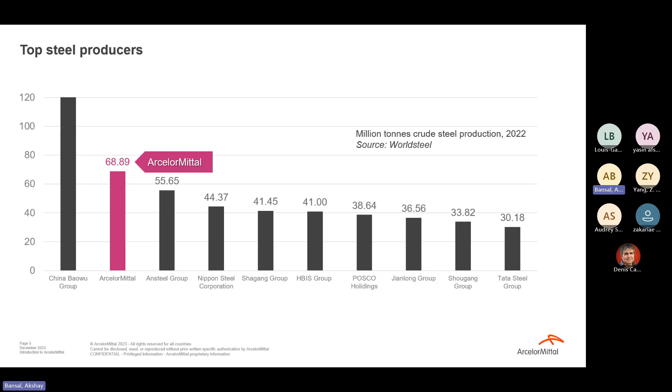And you can see that it's really fragmented. In the world, typically we produce around 1.5 billion tons of steel every year. The largest is 100 million or 120 million. So that means that it's really spread out. There are many different players inside the steel industry, and amongst all of those players, ArcelorMittal is right now the second in terms of production.

Okay, we are committed to a net carbon neutral target by 2050. We have a full roadmap which has been published in order to achieve that in Europe, but also all across our group. So 25 years is basically tomorrow for us, because in any major transition, we're not only talking about changing the way that we're doing, but transforming the things that we've been doing for the last 200 years. We need to change that in the next 25.

So we are definitely counting on new colleagues, just like yourselves, who will play an important role in achieving this target, while at the same time achieving the technological and scientific targets, the economic targets, but also the carbon neutrality targets, the environmental targets. So we need to be able to combine all of those.

Okay, there are some examples here that you can see. Something that really motivated me are some first-of-its-kind solutions which have been implemented, where ArcelorMittal has invested a lot of resources in terms of time, money, energy, research, that you see today but was started maybe 10 to 15 to 20 years before. So we always need to be preparing for the next 20 years.

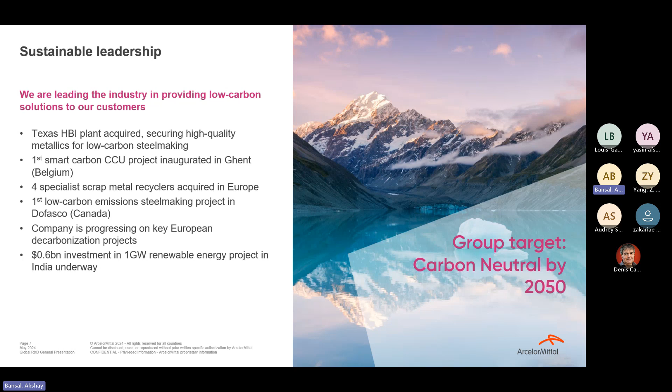I'm representing ArcelorMittal, but also global R&D, global research and development, where we are roughly 1,700 researchers, of which roughly 800 are currently in Maizières. That's where the historical R&D base has been. We spend roughly $300 million every year on research. So we are preparing for the next 10, 20, 30 years, while our colleagues at the production sites manage the day-to-day operations and production-related KPIs.

All our researchers are spread across 14 different geographical sites. We're not working only on metallurgy. You can say, okay, you're a steel company, you should work on steel, metallurgy, and so on. But no, steel cannot be made just because we know metallurgy. We also need to know process industry, energy systems, automation, mechanical engineering, civil engineering, data science, of course, optimization, chemical industries, and so on.

So if you enter global R&D, for example in Maizières, out of those 800 colleagues, I think you will find almost all the technical backgrounds that you have in INSA or any other engineering school.

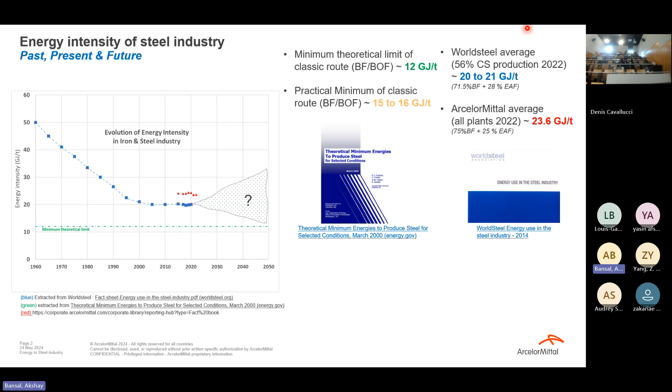You can consult some of these documents that I have here. These are not my numbers; these are public numbers coming from scientific articles and so on. And here there are two scenarios for how we can probably move. Either in scenario one we manage to find decarbonization technologies which are also low energy intensive. In that case, we are probably going to go from the current blue line towards the green line.

And the worst scenario, scenario two, is that we do the decarbonization, but we use some higher energy intensity solutions. That means we're going to go more towards a higher upward trend. So the risk is we're going to displace the problem from CO2 to energy. And even though energy could be green, it does not mean that we need to waste it. So we have to keep all of this in mind.

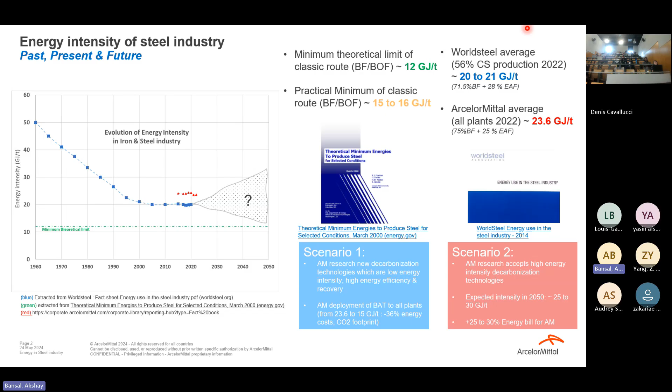The 23.6 gigajoules are the red dots that you see, which represent the ArcelorMittal numbers. We are, quote unquote, worse than the world average, but we are probably better than most of the others because we are publishing all of our numbers. We are fully transparent. So currently we are sitting at 23 gigajoules of energy per ton. So what does it represent? And this is only 1 ton of steel.

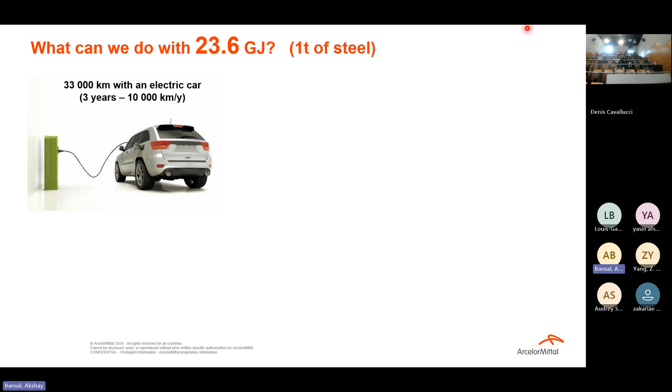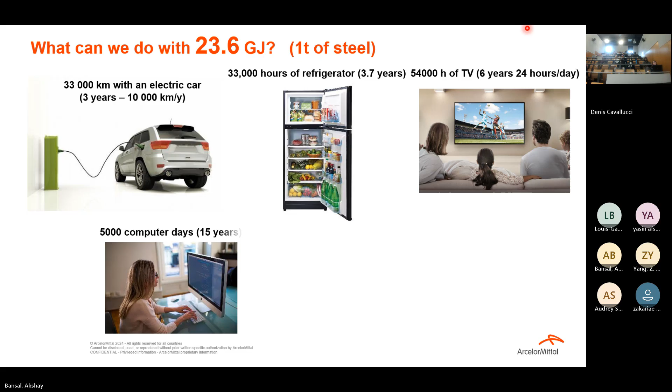23 gigajoules represents 3 years of electrical mobility, roughly 30,000 kilometers. Or 4 years of refrigeration, or if you wanted to binge watch Netflix, almost 6 years of Netflix nonstop, or 15 years of computer time, or if you were a very clean person, almost 50 years of nonstop washing. Just to say that this is 1 ton of steel. A car typically has around 1 ton of steel, maybe more. And how much do we produce? We produce almost 70 million tons of steel in ArcelorMittal. In the world, we produce 1.5 billion tons of steel. Billion with a B.

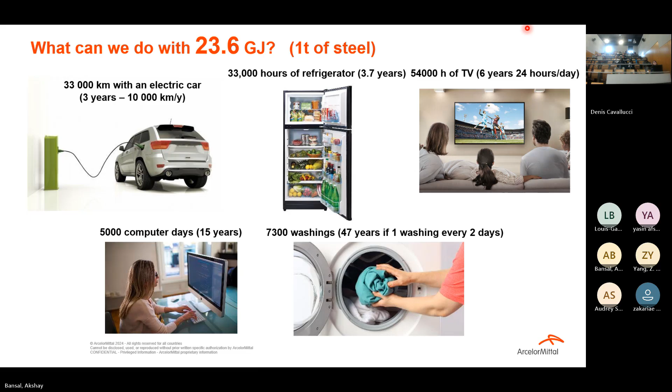Till now, about 70% of steel is made through the blast furnace route. You take the iron ore and the coal, you prepare them in the sinter plants or pellet plants and the coke ovens, and you bring those into a blast furnace. A blast furnace is nothing but a countercurrent chemical and heat reactor. You feed the raw materials from the top and hot gas from the bottom, and you have the thermal reduction process, but you also heat up and melt the iron ore, and at the end of it, you come out with pig iron.

Okay, so that's basically iron without the oxygen. There are some carbon molecules attached to it, so that's what we call pig iron. In French, it's called fonte. Okay, so once you have that liquid iron, that liquid metal is taken to the steel shop.

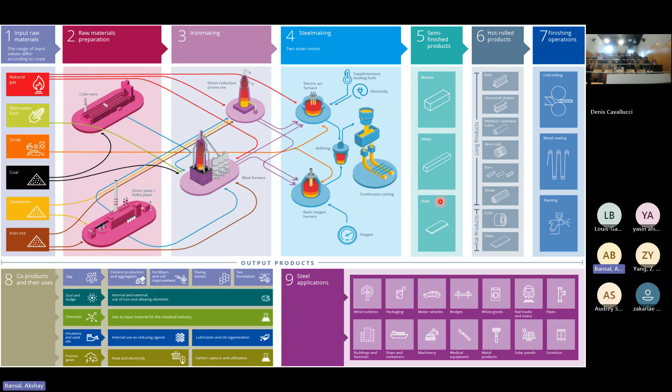Okay, I don't know if you're familiar with this kind of representation, but this is what we call energy Sankey diagrams. It's showing for each process what the inlets are, how the energy is coming into the system and how the energy is going out of the system. Let's take a small example. I'm going to zoom in on the coke plant. The coke plant is basically doing the pyrolysis of coal in absence of oxygen to create coke, and that coke is then used as a reducing agent inside the blast furnace.

Here we're already using the blast furnace gas from the blast furnace, and the coke oven gas from the coke oven itself is being fed into the coke plant. Coal is injected as well. And then you can see on the right hand side, in the red arrows, the different places where energy is coming out. Energy is already coming out in the form of coke oven gas, which is reused.

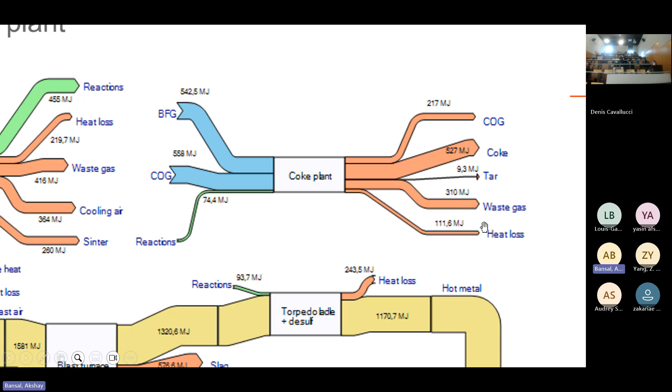In case of coke, in case of tar, in case of waste gases, heat losses, and so on. All of these numbers are in megajoules per ton. So if you go and read about these kinds of things, you're going to find that there are still some places where we are not able to recover the energy, and that energy basically corresponds to that gap that you saw earlier between the 20 gigajoules and the 12 gigajoules.

So that's the 8 gigajoules, which corresponds to all the waste energies that we still have in our processes, which we are not able to capture right now because of lack of technologies, or because it's very difficult to recover energy from something which is solid or liquid at 1200 degrees or 1600 degrees. If you just put a heat exchanger on top of it, the heat exchanger is going to be destroyed within a few weeks. A typical heat exchanger would simply not work.

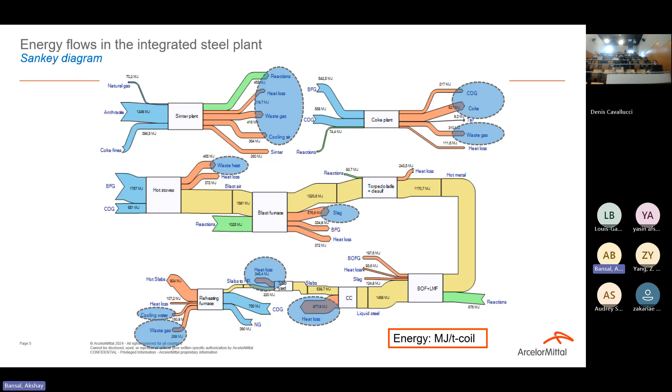So you need to imagine new kinds of heat exchangers which are not on the market in order to hit those higher temperatures. And we are also talking of very high energy fluxes, hundreds of thousands of normal cubic meters per hour of gases, very high temperatures, dust, pollution and so on. So you need to be able to manage that. So these are just some

The steel industry in general is responsible for 7% of all greenhouse gas emissions. Here's an example of the CO2 footprint, showing which process is responsible for what CO2. Typically 60 to 70% is at the blast furnace level. That's why you hear a lot about replacing the blast furnace by a direct reduction plant, or through electric arc furnaces.

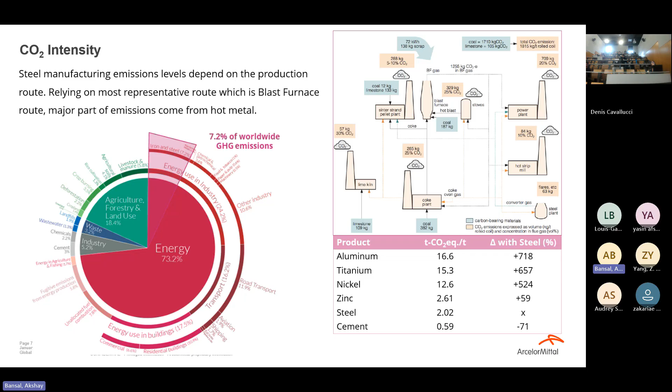So at this current state, steel has 2 tons of CO2 to manage per ton of steel, and there are different ways of reaching the target. We have a big target in front of us. Within all of this context, energy and CO2, we want to propose this project to you within the ECIU framework, where we want to understand how solar energy can be integrated into the steel industry. And not solar PV, we want to integrate solar thermal.

So you have heard about solar thermal energy. People in the room, have you heard about solar thermal energy before?

Yes. So maybe hot water out of solar thermal. Yeah. So you have those solar panels. Everyone has heard about photovoltaics. Okay. Some of you have heard about solar thermal. So what we want to focus this project on is the solar heating applications.

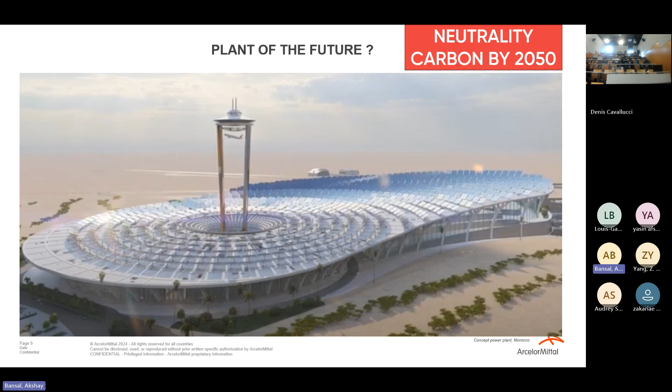You have the tower in the middle, you have panels, not solar PV panels, but solar collector panels. Basically, these are like mirrors, which are going to reflect solar rays towards the concentrator. Okay, and then once the heat has been concentrated, you can use it for different industrial purposes.

Okay, so the aim is that you determine the different ways to integrate solar energy, and that is solar heat, not solar photovoltaic, solar heat in iron and steel making processes, either the existing processes or the new processes which are being developed right now. They could also be beyond the scope of steel industry. They could be through carbon capture. They can be in hydrogen production. They can be in different ways. But that should be your solutions.

Okay. Once you have done your analysis of the problem, once you have reached that level of maturity, you will find that these solutions will come up. Some open challenges that I can propose to you right now. Okay, but again, this is not an exhaustive list. My understanding would be that you will be going through your project, you'll be also identifying other open challenges and then solving those open challenges. So some I have noted.

One of them is how to ensure that the heat that is available at the solar tower, which is beyond 1000 degrees, even in some cases 1500 degrees C, that you don't reduce that. I don't know if you're familiar with the concept of exergy. Someone? Exergy is basically the quality of energy. In another way, it's the temperature level of energy. Okay, 1 gigajoule of energy in a glass of hot coffee is not equal to 1 gigajoule of energy in hot steel. The temperature is different. So the concept of exergy comes there.

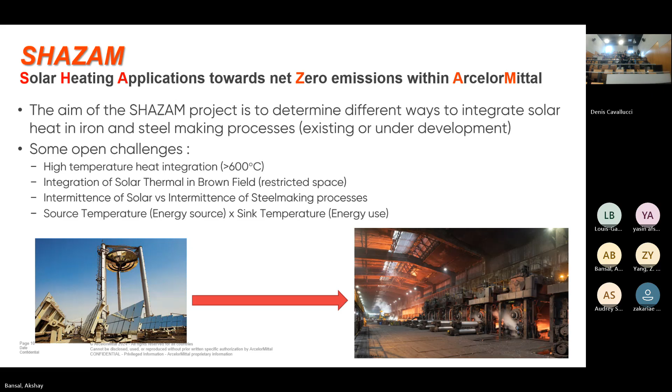Another recommendation could be, instead of looking at the steel industry fully, because you will have trouble during your project, maybe you can choose one area, or maybe you can choose one process. Okay, you are free to choose which process you would like to work with. Each process, as we saw in the Sankey diagram, has their own influx of energy and outflux of energy. So you can choose. You can just focus on the hot rolling, or you can just focus on the coke plant, or you can focus on the DRI, or you can focus on the blast furnace, and so on. Up to you. So the choice is yours in that way.

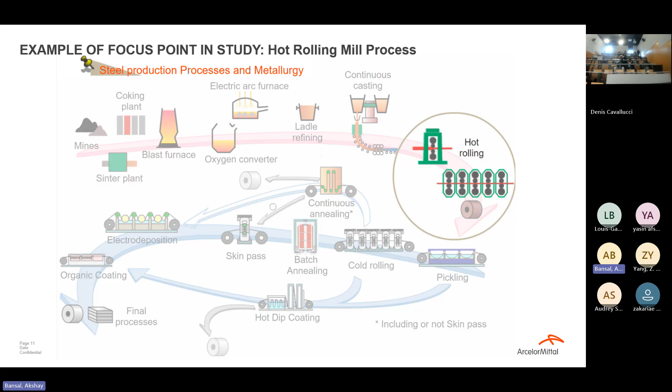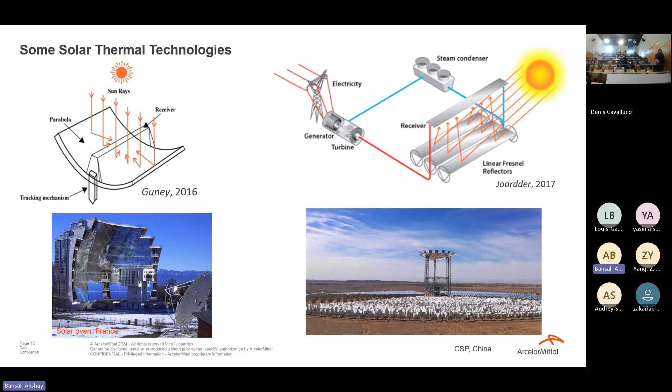Also, there are many different solar technologies already available on the market. Again, up to you to match those solar energies with the process. There will be some solar energies which do not produce 1600 degrees heat. They only produce steam at 400 degrees or 200 degrees. But then maybe you can match it with some industrial process which needs the steam at 250 degrees. Okay, but that should be part of your thinking process, and that should be part of your resolution of problems. So I'll stop here and then open the floor for some questions,

Up to you. If you feel that in order to satisfy the intermittence on both sides, energy storage is one way of, let's say, solving that problem, maybe. But that should be part of your reflection once you have identified the real problems. Okay, storage could be good, but it can also create other problems.